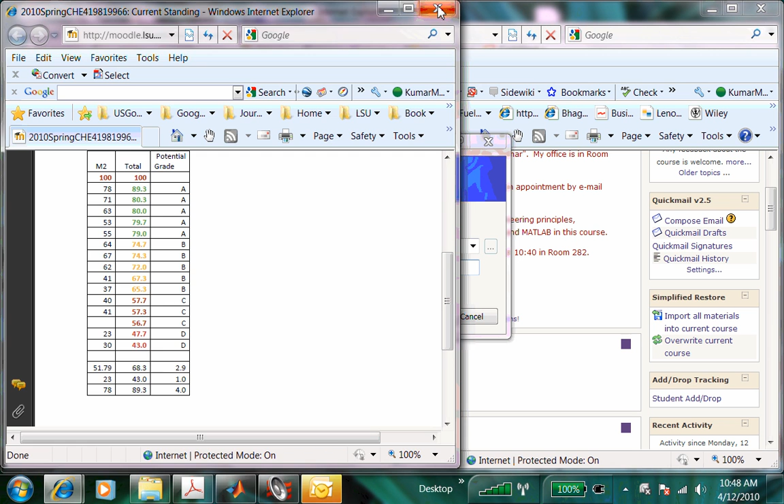Okay, if not, let's continue. We still have quite a number of topics to cover, but we are focusing primarily on feedback control systems. So what I'm going to do is look at feedback control systems for two types of problems that we've talked about. So we're going to use examples. And what you should be able to do in the final exam, and then when you go out into industry, is use these concepts. Replace the heated tank, as just an example, with any other process. Okay? And then design a controller, understand what various functions in the controller, like the proportional, integral, derivative, do to the process. And we're going to do that through a series of examples.

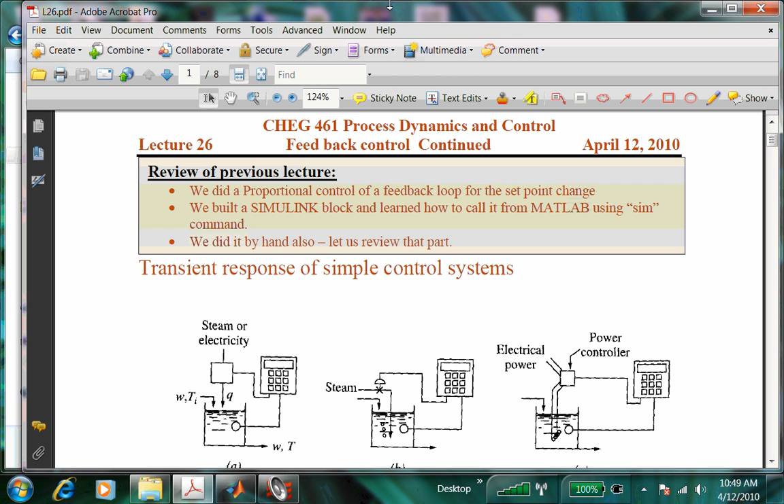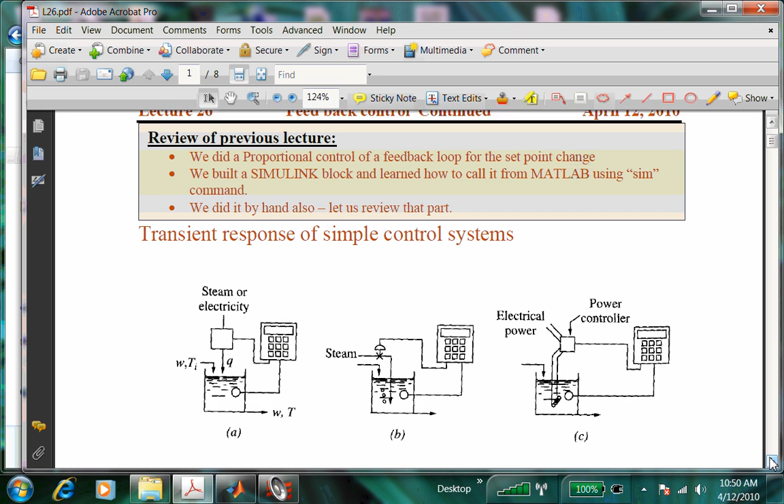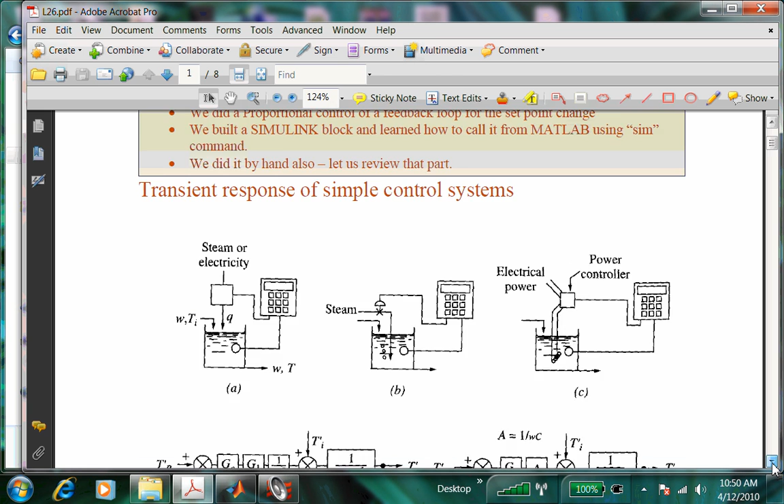We should be able to do it by Simulink, by MATLAB programming, and by hand. By hand I'm insisting simply because it's the only way I can test you in the final exam. But otherwise these days, hand is not really necessary because we have these tools. But you need to understand the tools, and you should be able to use those tools. Okay, so we looked at the regulatory problem. That is, when you make a set point change, you want the process to track that set point change. And the last lecture, almost a week ago, we looked at this problem where we had only a proportional controller. So GC is the proportional controller, and there is the heater.

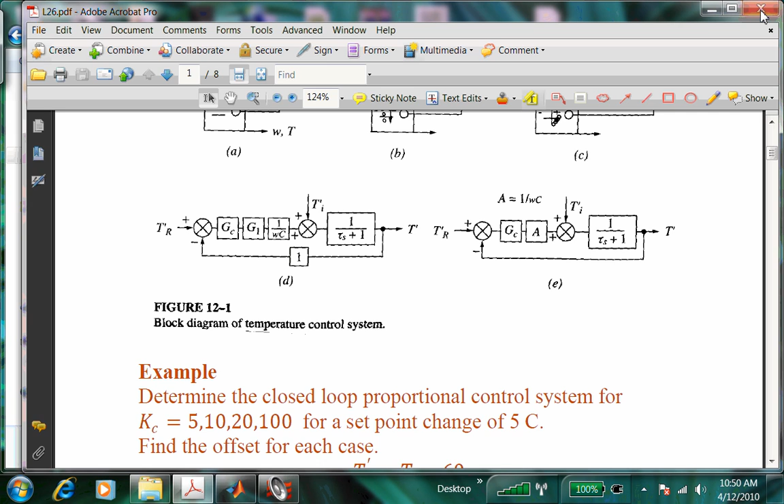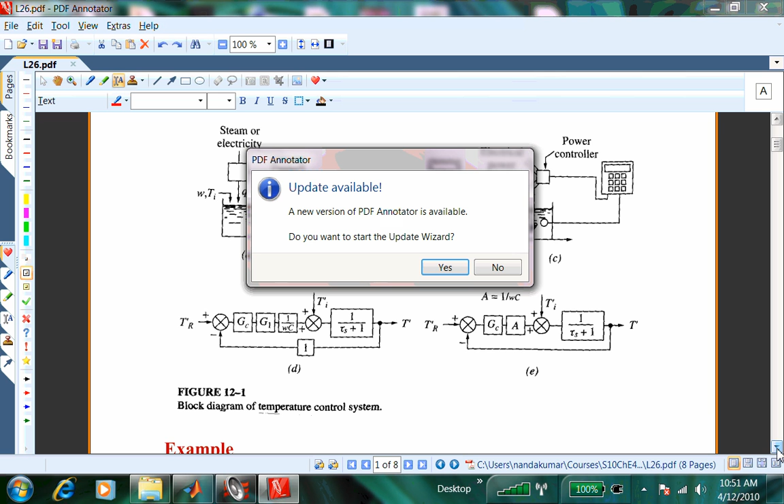I guess I probably put the wrong program. Not right. Okay, there. I don't want that now. Okay.

So we are looking at only a proportional controller. Okay, there it is. And the heater transfer function is simply a gain 1 over WC. And then the process transfer function is a first order process, 1 over tau s plus 1. And there is no measurement delay, so in the feedback loop there is no delay. It's simply a signal instantly measured. And what we were asked to do was look at the response of a proportional controller for various gains using a set point change of 5 degrees in TR.

So this we need to understand, the difference between a set point change in the process, which the process must track, versus a disturbance rejection, a load change. So if I change the inlet temperature, I still want the outlet temperature to be at the same value as before. Whereas when I make a set point change, I want the outlet temperature to follow the set point change. So I want the process temperature to go from 80 to 85 degrees. So I increase this by 5 degrees, then this must track. It must go from 80 to 85 degrees.

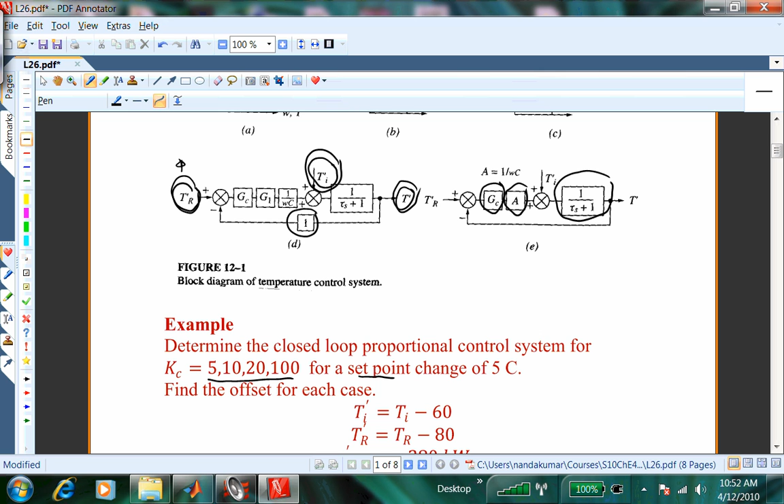Whereas if this changes, the disturbance changes, that is the inlet temperature goes from 60 to 65, you need to adjust your heater duty in such a way that the outlet temperature still is maintained at the old value of 80 degrees. So these are two different kinds of problems. The framework for analysis is the same for either one of them. So here for a set point change of 5 degrees, we did this in the last lecture by Simulink. Okay, so I'm just completing that part without Simulink.

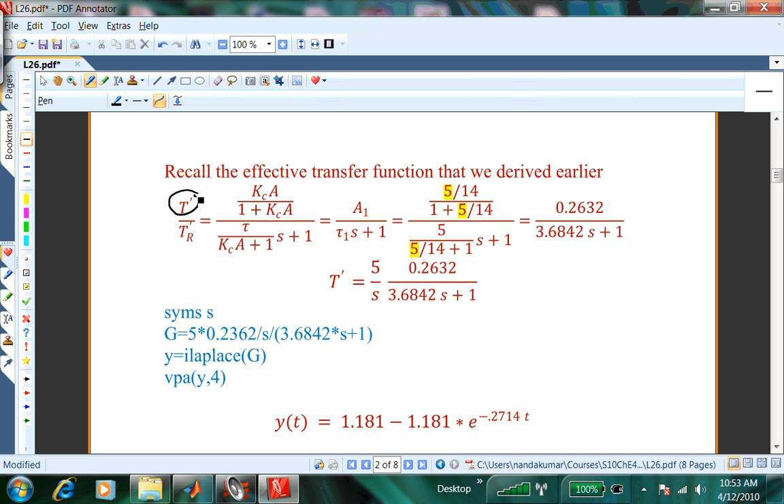Okay, so we have to find the effective transfer function between the outlet and the set point change, T prime and TR prime. So if you look at the process diagram here, that's going to be the effective transfer function. It is going to be everything between the outlet and the inlet in the forward path. The forward path is this way. So it's going to be GC times A times 1 over tau s plus 1 divided by the feedback loop, which is everything in the loop. But in this case there is nothing in the return loop, so it is simply the same thing, GCA divided by tau s plus 1.

That is your effective transfer function between T prime and TR prime, the deviation variable between the outlet and the set point change. So if the set point change TR prime goes by 5, the outlet temperature should increase correspondingly by 5 degrees. So you should tune the controller GC in such a way that it reaches that target in the best scenario, in the least possible time. Okay.

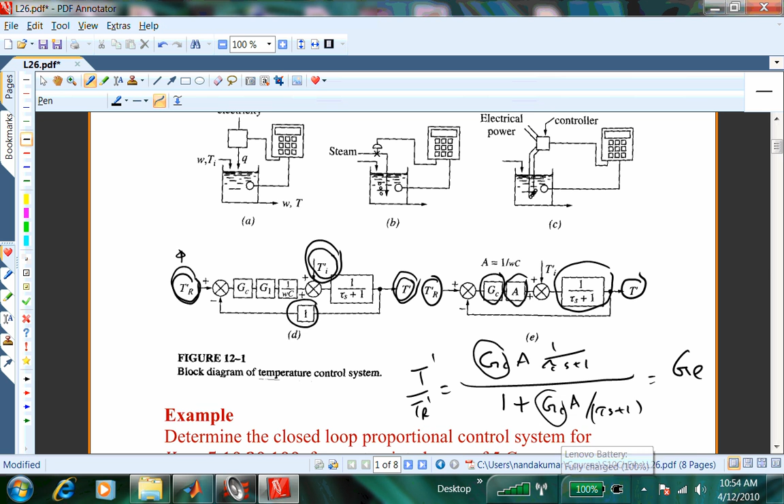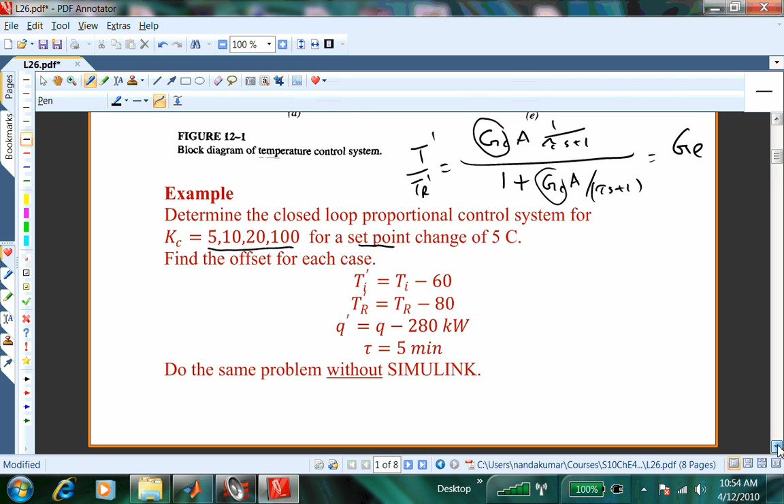So this is the effective transfer function, and we have done some algebraic manipulation to write it in the standard form. That's what you see here. So this is written as a new gain, I'm calling it A1, and a new time constant tau 1, S plus 1. So the whole effective transfer function is still a first order. That is something important to notice, because when I change this from a proportional controller to a proportional integral controller, the effective transfer function will change its characteristics from a first order to a second order system.

So I would request you to go through the algebraic manipulation, take the previous one that I wrote down as an effective transfer function, plug in all the numbers, and what you're going to get is this as your effective transfer function. And then we're making a step change of not 1 degree but 5 degrees. So this is nothing but TR prime in the Laplace domain. If I make a step change of 5 degrees, then in the Laplace domain it is 5 over S. So this is then the output, T prime. The output process temperature is 5 over S times 0.2632 divided by this.

So this you should be able to do in an exam. Do partial fractions, invert it, and I keep repeating it. In an exam, I give myself the freedom to give you up to a second order here. I don't count the 1 over S there. You should be able to factorize a second degree polynomial to get into partial fractions. And then I'm here using MATLAB to define that output and then take the inverse. And what you get is, in the time domain, the response of the system. So now we need to plot this to see how the response is.

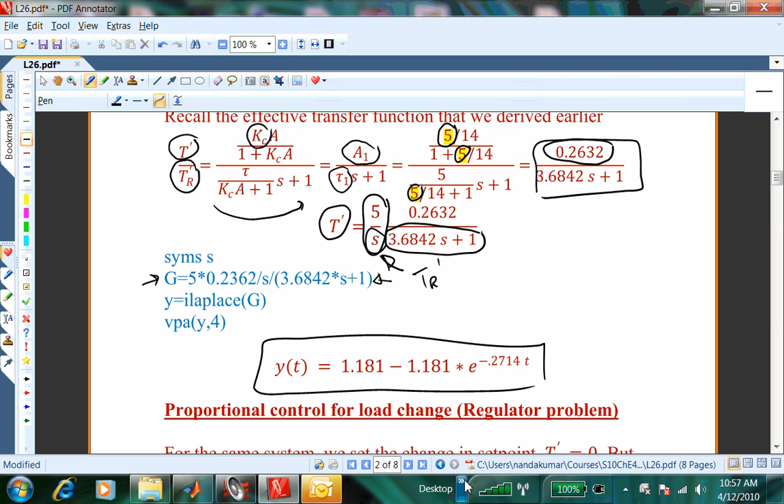You should be able to do analysis like this in an exam where you get the output response and answer questions like what is the time it takes to reach 80% or 90% of the steady state? How is it affected by changes in Kc? Things like that.

Okay. If there are no questions, let me go to the next problem, which is what I call the regulator problem. So here there is a change in the load, in the disturbance to the process, and the disturbance has to be rejected. Okay. Now, one thing I need to reinforce: when you have only proportional controller, whether it is a servo problem, tracking problem, or a disturbance rejection problem, you'll always have an offset.

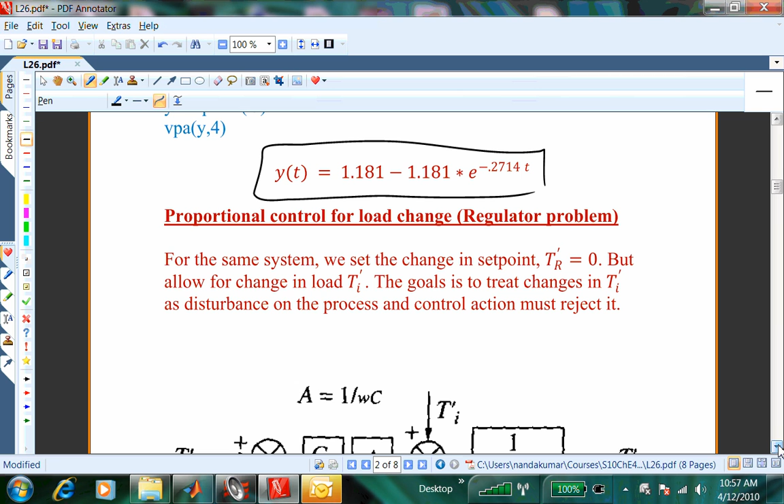Okay. So in the previous case, what would be the offset? Looking at that result. I'm not really then getting through, am I? Does everybody get that? Okay.

So what is the offset? How do you answer that question? The offset is the difference between the final steady state value and what you want it to be. So we wanted it to be 5. We are making a step change of 5. So we want the final temperature to be 5 degrees above the current steady state value, because these are all in terms of deviation variables. Okay? So we want it to be 5 degrees above,

but as t goes to infinity, this term goes to 0. Okay? So the steady state temperature that you're going to get, the deviation you're going to get is only 1.18. You want it to go to 5, it goes only to 1.18. So there is an offset. Okay? And that offset, that number will be affected by changing Kc.

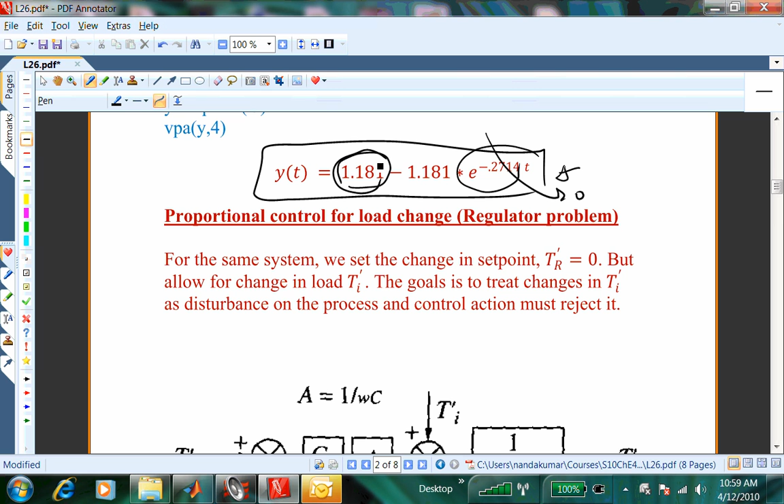Okay? And so the question might be, plot how does offset change as you change Kc? Okay? So no matter whether it is a disturbance rejection or a servo problem, tracking problem, you will always have the offset if you have only proportional controller. So the next problem we are going to see how we can overcome that using the integral one.

But before that, let's look at a case where TR, the set point change is 0. So I want the process to remain at 0 in terms of deviation variable, meaning it must remain at the current steady state value, whatever it is. But there is a disturbance coming in from the inlet temperature to the tank. It goes up by 5 degrees. What should you do? Okay. So of course, when that happens, you will sense that, and then you'll go back and adjust your heating rate in such a way that temperature is brought back.

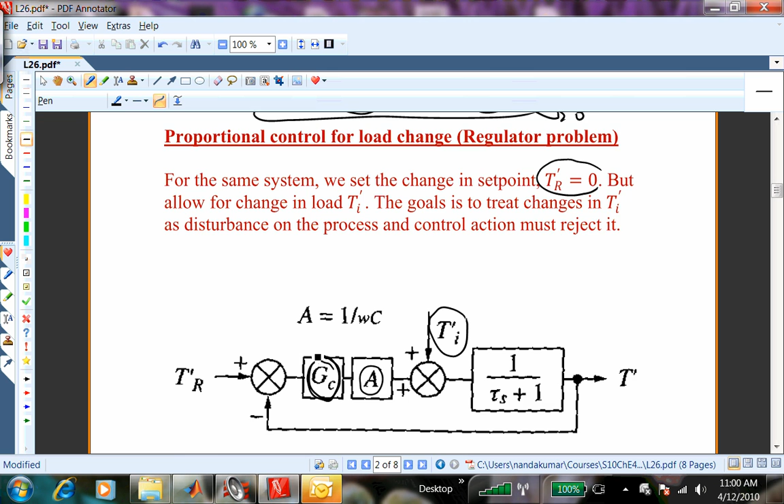And how fast will you adjust? That is what you're going to decide as a control engineer. You're going to decide what should be the Kc value to determine how fast the response is. Okay? How would you begin to answer that particular problem? A 5-degree step change in this, and plot the dynamic response of the effective process under a feedback control system where Kc is equal to 5, 10, 20, 100, etc. A series of numbers.

Find the effective transfer function. If you're doing it by hand, you will find out what is T prime divided by Ti prime. Okay? Because you're making the change to Ti, so you want the effective transfer function between those two. So what would that be? Using the rule, whatever is in the forward path between the output and the input divided by the loop. Okay? So in this case, there is only 1 over tau s plus 1 in the forward path between Ti and T prime, divided by 1 plus everything in that loop. Okay? So that's going to be GCA divided by tau s plus 1. That is going to be the effective transfer function.

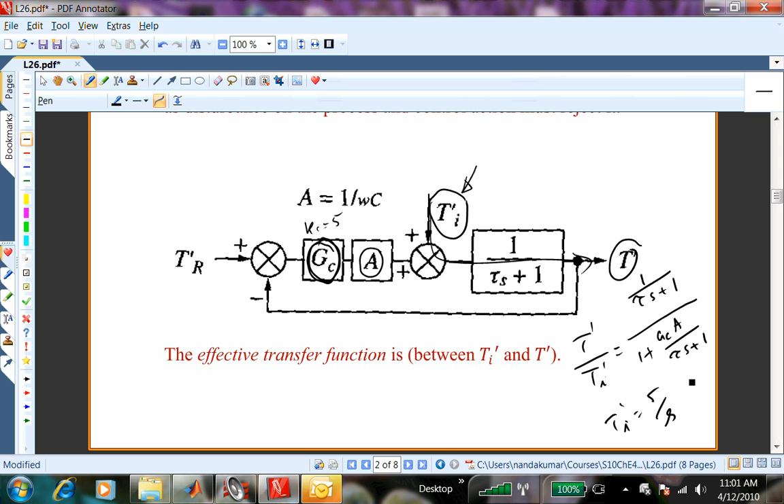Now we can plug in the numbers and then put Ti prime as equal to 5 divided by s, a step change. Okay? Of course, you should be able to do the same thing if I have not a step change but an impulse. Okay? Impulse response, what would be the thing for impulse response? It is 5. Okay? And if it is a sinusoidal change, if I give you the amplitude and frequency. So this is why we saw all these in parts. Now we should be able to put it together in any variety of ways, Simulink, MATLAB, or by hand. Okay?

And there it is. So this is the effective transfer function, T prime over Ti prime. And we'll rearrange, simplify, and get it as an effective gain and an effective time constant. Now, this time constant is different from the process time constant. Tau is the process time constant.

Okay, whereas this tau 1 includes the effect of the feedback controller. It includes, for example, Kc. Okay? So in fact, I've given you what tau 1 is. Tau 1 is equal to tau divided by 1 plus Kc A. Okay? So it depends on both the heater transfer function A and the controller transfer function Kc.

Now, at this stage, if I ask you to find out what is the offset for this kind of a regulatory problem, how would you go about it? There are many ways of doing it. One is, okay, I have the effective transfer function, I can invert it, I get the time domain solution, and then look at time as t goes to infinity. Another quicker way is to use the final value theorem without even having to go back to time domain. You can say, okay, I know the transfer function, so if I multiply it by s and take the limit of s going to 0, I'm going to get the final value without having to solve the problem.

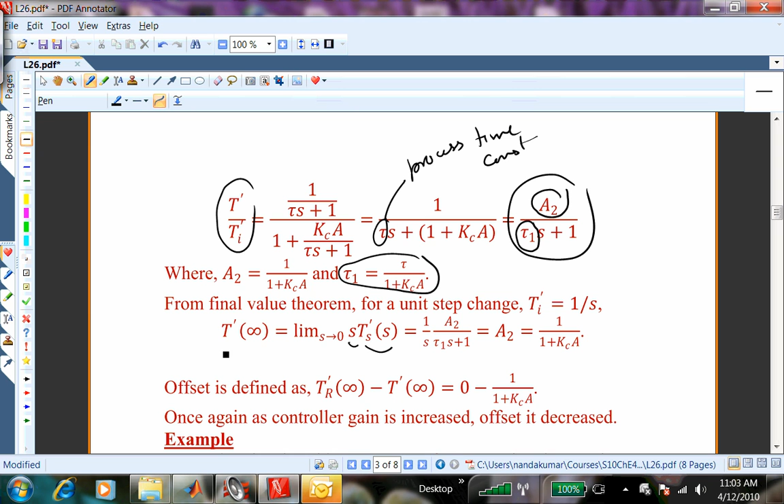And so when I do that, I get the final value of the process temperature as t goes to infinity is, as s goes to 0, s times Ts. Okay? And then multiply by s, and so I think there should have been... I have a typo here. Can you find out what the typo is? I didn't multiply by s there. Here I did. The next one, that s should be there, and then this entire thing is A2 divided by tau 1 s plus 1 multiplied by 1 over s.

Okay? So this is for a unit step change. Okay? So then the s will cancel out, and when you put s equals 0, you get A2. So A2 is your final temperature. So the offset will be the difference between what you want it to be. In this case, you want it to be 0 because it's a disturbance rejection. So you want the final process temperature to remain at 0 deviation variable. That is, whatever the current value is, you want it to remain there. Minus whatever this particular controller does, and it takes it to 1 over 1 plus Kc A. So that is an analytical expression for the offset.

Okay, so we can do this now for various values of Kc. What do you see? As you increase Kc, what happens to the offset? It gets smaller and smaller. So the only way to get rid of the offset is to have Kc equal to infinity. Okay? But there are other consequences of increasing Kc. Large value of Kc will give you a very quick response, very dynamic response, but it might make the system unstable. So we will see how to understand the implication of changing Kc on stability, and how do we design it in such a way that the feedback control system remains stable. Any questions?

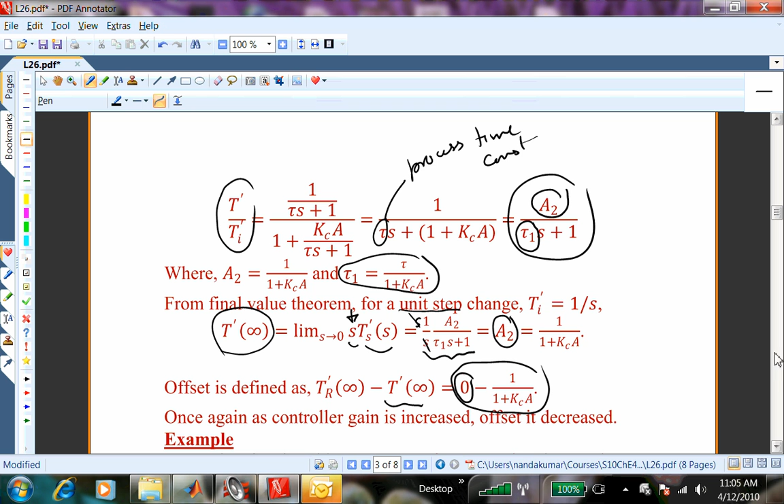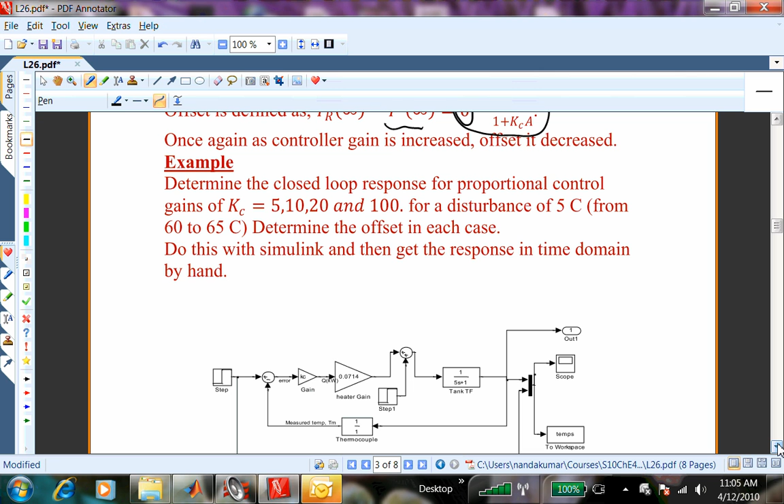Okay, here is a specific numerical problem. Determine the closed loop response for the proportional gain of Kc equals 5, 10, 20, and 100 for a disturbance of 5 degrees. Determine offset in each case. Do this with Simulink, then get the response and determine it by hand.

Okay, so there is the Simulink block diagram. How many of you feel that you still need help in Simulink doing this? If I give you this problem and put you in front of a computer, how many of you will have difficulty building the block? The reason I'm asking is I need to then give you some more problems and assignments that you can do. We've done this enough that all it needs is practice. I don't want to construct it in front of you every time because that takes up time. Right? So is it okay if I just throw this diagram and then go through it? Or, okay.

Good question. I just copied from the earlier one and added what I needed, but if I didn't do something to the step change, I will be introducing an error. So let me actually start. That's only a copy of the diagram. Here I have the actual Simulink model.

So your question is, why do I have this? Right? Now look at it and tell me, does it matter? I've gone into this program and changed it to 0. There is no step change. Okay, it's still there so that in case I want to replace it with something else, I can do that. But that step change is not effective.

But what I've done from the previous problem is added this block. Okay, this is the step change that corresponds to disturbance rejection. So here I have a disturbance of 5 units in Ti. Okay, and that enters just before the process. So the process is here, 1 over 5s plus 1, and this is the disturbance that is added to whatever the signal that comes from the heater.

Okay, and then this is a measurement. The measurement block is 1, and this is the feedback control, feedback loop that goes back. So it's essentially the same thing that I had before for the first problem that we did. All I've done is I've added a step change. So this is where the power of Simulink is.

So if you have this, I can then ask you questions like, what would happen if I put a sinusoidal change? What would happen to the output frequency? What would happen to the output amplitude? And that is an important part because when you're doing the stability using something called the Nyquist method, we will be using this kind of an analysis. But for now, let's get back to this.

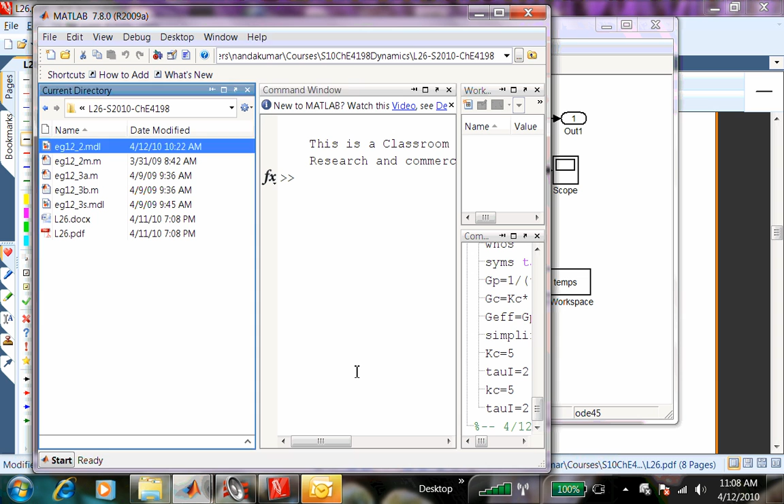So I have left Kc as a symbol here. This is the controller gain. And this is the heater, 1 over WC, 1 over 14, which is 0.0714. And you should be able to change any one of them to the appropriate process model. And so in order to run this, all I need to do is, in the workspace, I need to define Kc. Okay? So I go back to my workspace and put Kc equal to 5.

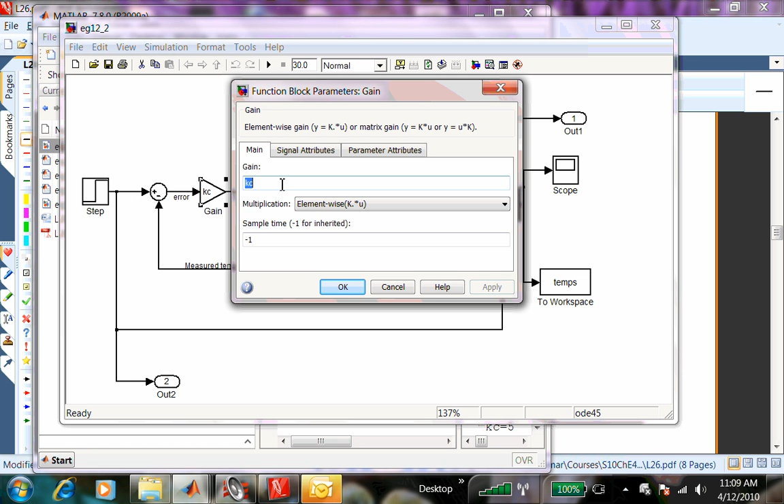Because I want to do this as a parametric study for Kc equal to 5, 20, etc., I'm just building myself that freedom by simply defining Kc as a symbol here. If I open the block, all I will have is gain as simply Kc, a symbol. So when it executes it, it's going to look into the workspace to look for that value. Now I can execute that. And you can see that figure. Okay, can you interpret that figure?

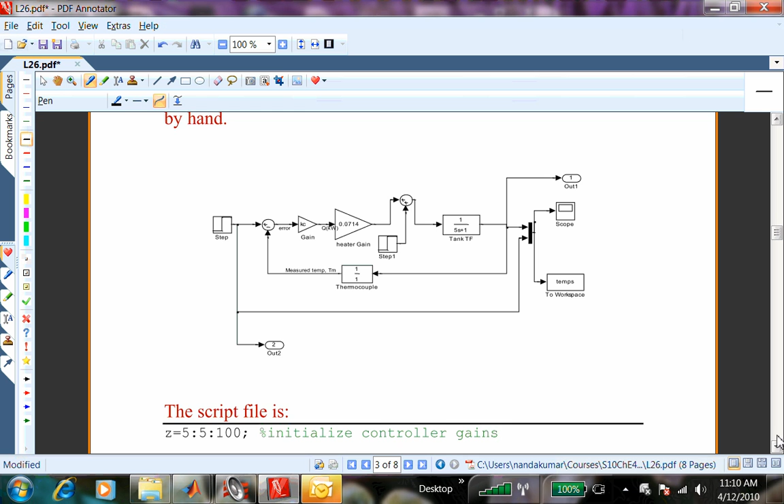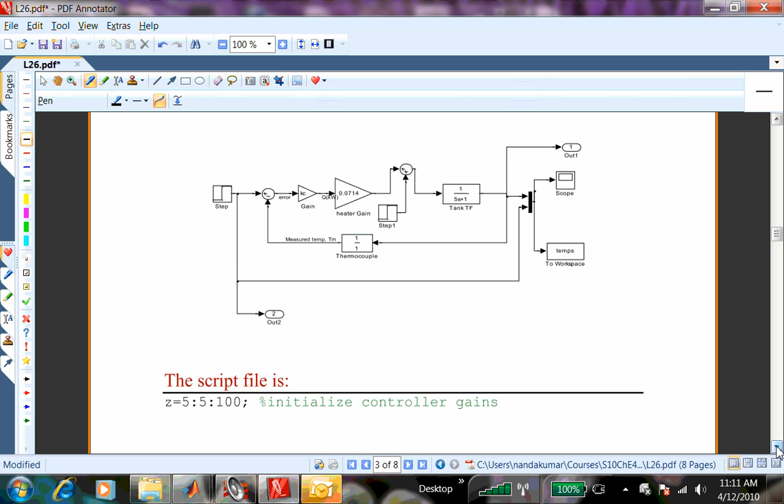Now we want to run this Simulink model many times, going from Kc equal to 5 to 100. Okay, so here I've set up a loop. We're going from 5 to 100 in steps of 5. Each one is a value of Kc. Because I've built Kc as a symbol in Simulink, I'll be able to run this from MATLAB. So all I'm doing here is setting up a loop for every value of Kc in that vector Z that I created, and then I pick that value from the vector Z and store it in Kc.

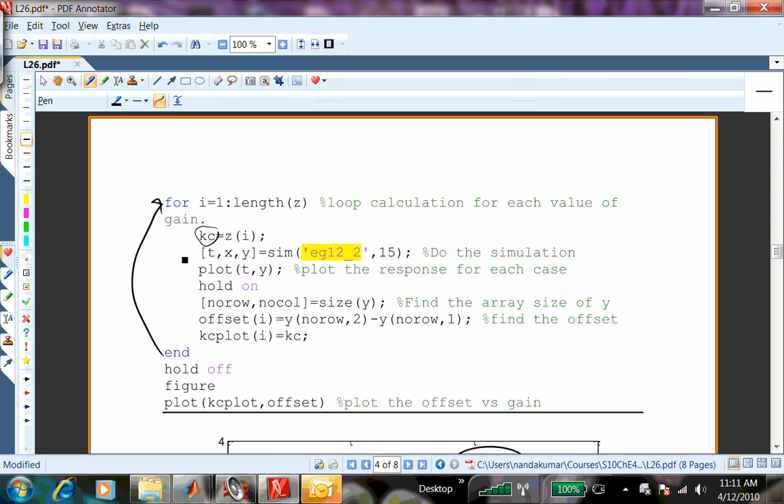Now it is this one that is going to pass the value of Kc to Simulink. So here I'm defining the value of Kc every time as I go through this loop. The loop is repeated 20 times or 19 times or whatever. And this is the one that actually executes the Simulink model. So the command is sim, and this is the file that contains the Simulink model. So you build a Simulink model, save it in a file, and then give the file name here. Here you say do it till 15 minutes. That's the time over which you want to integrate the Simulink model.

And then what Simulink sends out is a vector called t, which is time, and a vector called x. This I think I probably did not answer last time to your question. X is actually something called a state variable. For now, we will not worry about what it is. When we look at state space models, we will understand what it is. But Simulink automatically deals with an internal variable called a state variable, state space variable. That's what X is. Now, Y is the variable that we compute in the Simulink model.

So if you go and look at the Simulink model, I send out two values, out 1 and out 2. Okay, so these are the ones that are sent out as Y in the command where I call Simulink. Okay.

So Y contains all the output links. I can have as many output links as I want, but it will be sent as columns of Y. So Y will actually be a matrix. Each column will contain one of those output links that I have in the Simulink block.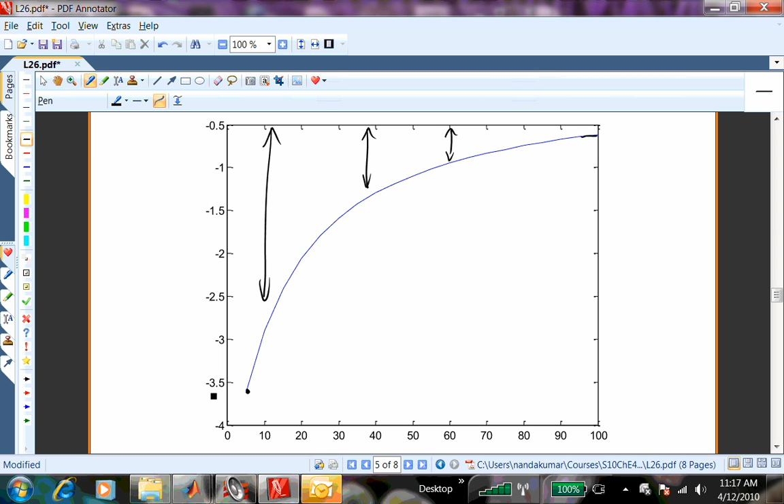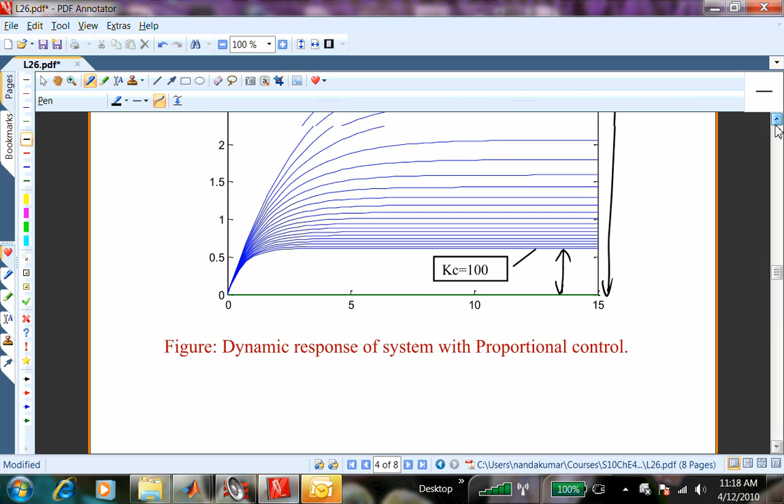Oh, yeah. This simply says, let's make sure that we understand this, okay? I don't want to sidestep this. What does this diagram tell us? This diagram tells us whatever the steady state value is, the process temperature is going to be above that. So when Kc is 100, for example, the steady state temperature is going to be 0.5 or 0.6 degrees above what we would like it to be.

Suppose the process is operating under steady condition, the outlet temperature is 80 degrees, okay? And the inlet step change is 5 degrees, the inlet temperature. So the controller is going to take action by reducing the heating rate to get rid of the effect of the 5 degree increase in the inlet temperature. But it's not able to do that.

Without any controller action, what would happen to the outlet temperature? If the inlet temperature goes up by 5 degrees, it's a linear process, the outlet temperature will go up by 5 degrees over a long term. So the controller action is bringing it down: if it is 80 degrees, instead of being 85, it's going to be 80.5 when you use Kc equal to 100.

So this diagram simply tells you what will be the process temperature, and if you are asked what is the actual process temperature, you should know what the current operating steady state value is, add this to that, and that will give you the process temperature. Okay? But the offset is defined as the deviation from this. And so that offset decreases as Kc increases, but it is a negative value simply because that's the way we defined it. Okay?

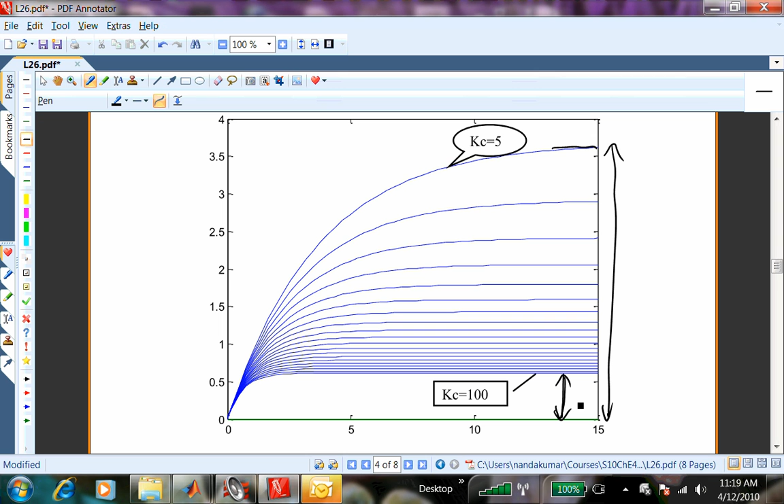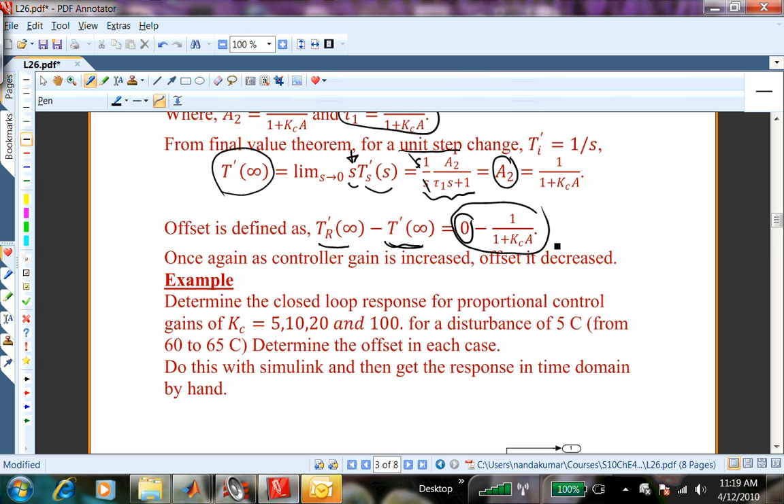And yeah, so the definition says 0 minus that. Okay, and that's why I get that negative sign there. Any other questions? Yeah.

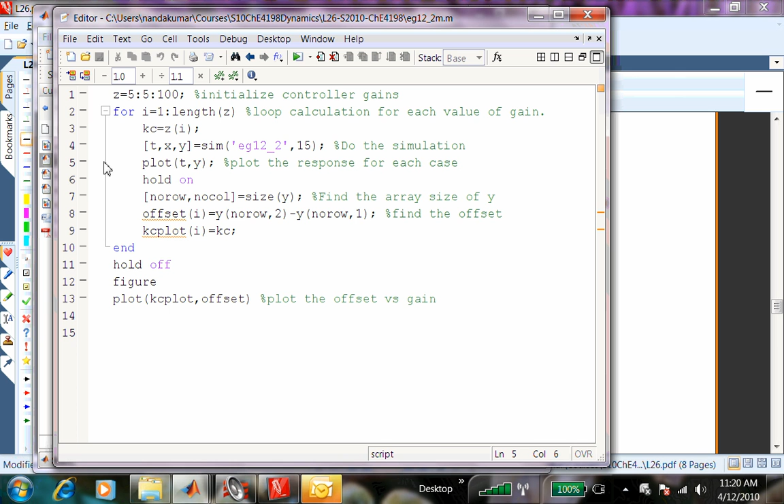Yeah, let me just run this. Okay, so this is the script file. So you're asking this one, right? Is it plotting both columns or one? Yeah. You do see another line, and now as you run through this loop, you will see that it keeps on adding to that graph. At the same time, it's accumulating what the offset is in line 8, but it doesn't plot it. It accumulates the offset for every value of Kc, and then it'll plot Kc versus the offset at the end.

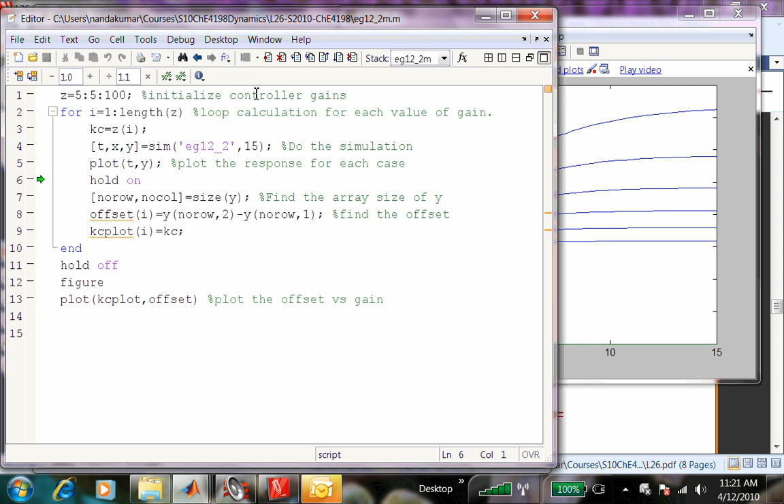So you see the second line appearing, third line appearing. Every time I go through the loop, if you want to look at the value of Kc currently, it's 20. Okay, so it just keeps on plotting that. Remove this and then run it. It's going to add all the cases and then plot the final graph, which is offset versus Kc. Okay. That's the last line. Line 13 generates this graph. Pretty true. Any questions? Yeah.

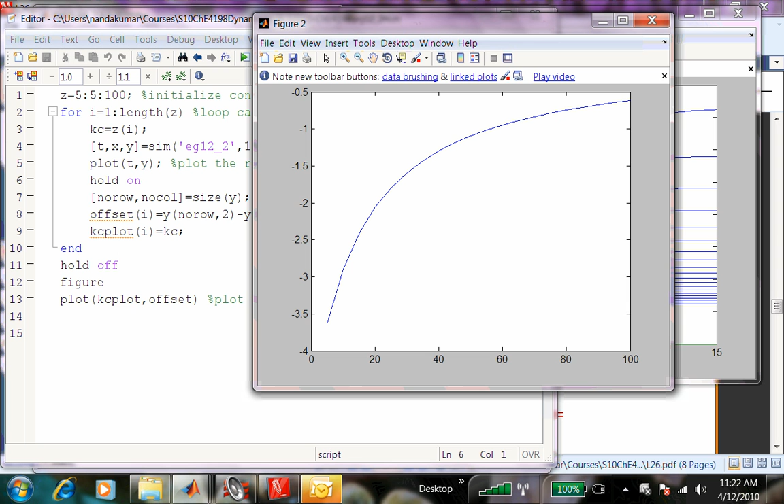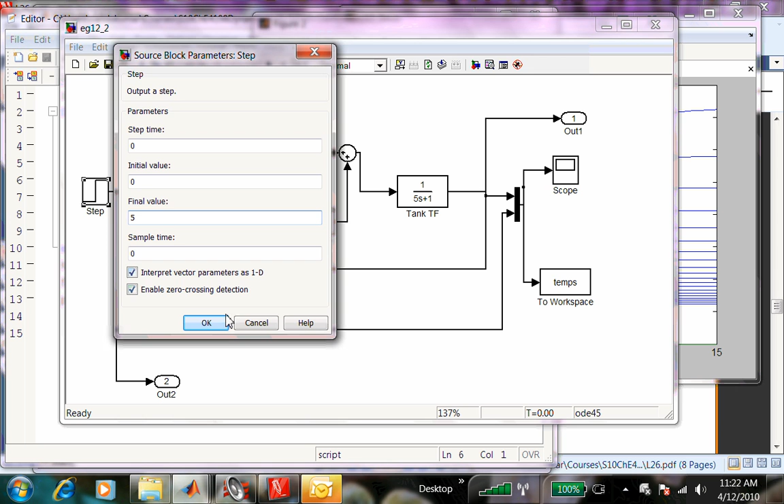Yeah, good question. So you're asking, when I have a disturbance, simultaneously I have a step change in the goal. Is that what you're asking? What do you want the goal to be? 5 or minus 5? Let's do it 5. I don't know the answer. To find it analytically is going to be very complicated. You have to use superposition, a lot of algebraic manipulation. What we are doing now is, we have step change in both the disturbance and in the servo problem. Okay? So when you run this,

so the step change, wow, it looks like it reached, there was no offset. I was not anticipating this. I thought that there will always be an offset. So there must be a special situation where, if you make a disturbance change of 5 degrees, the heater is trying to compensate that, right? So that somehow cancels. Yeah. Right.

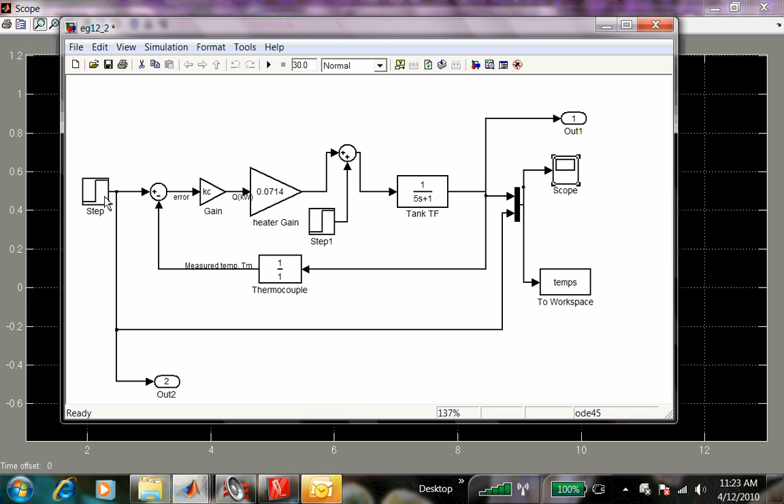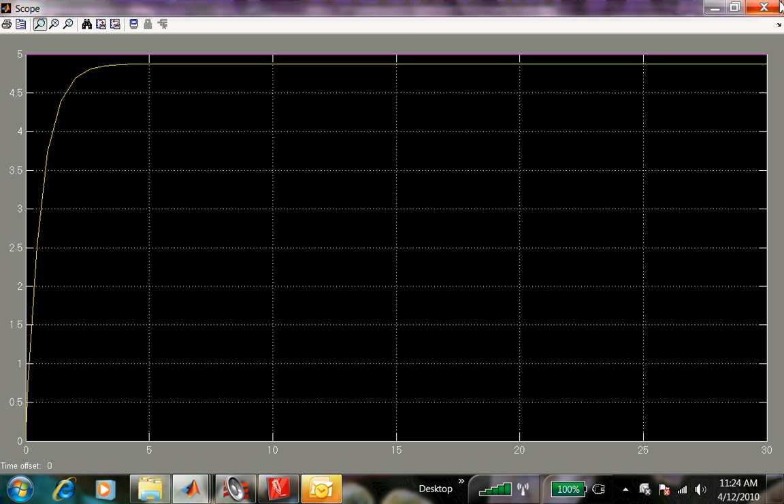Disturbance of 4 you want, right? Okay. This is the nice thing about the MATLAB Simulink environment. See, now you have an offset. Right? So that was a special cancellation because it was 5 in both. But you do have an offset, yeah. And you can play with this by putting ramp inputs or sinusoidal or any other. Remember, in one of the exams, you had this complicated input function. We had a ramp and then a step and things like that. So Simulink makes all those very easy to implement. Any other questions? Okay.

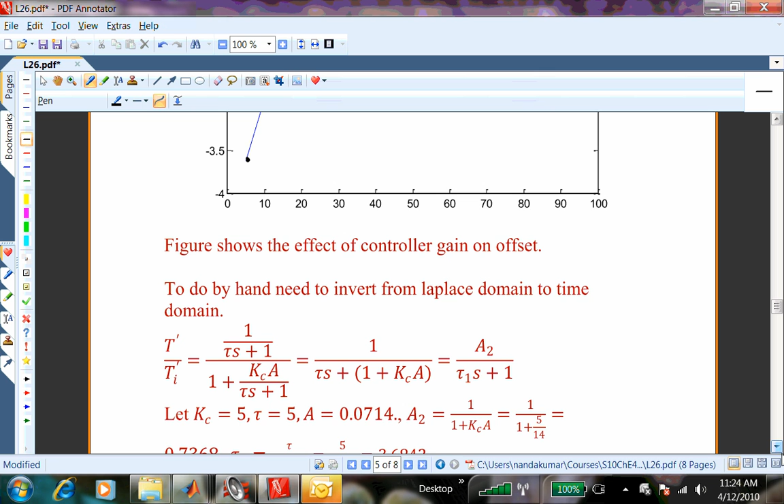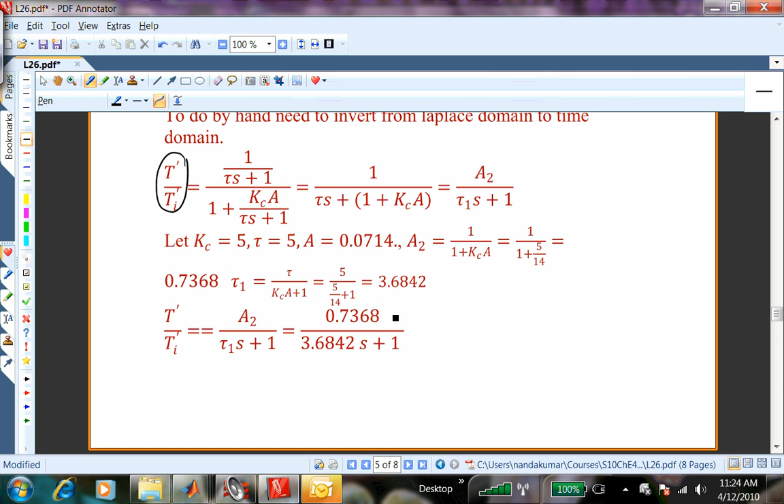All right, here by hand. By hand simply means you're going to find this effective transfer function between the output and the disturbance in this case. And I've shown you, after plugging in all the numbers, what happens to that effective transfer function. Okay? That is going to depend on Kc. So you have to do this for every Kc by hand. And then you can put a step change for Ti, that is 5 over S, step change of 5 units, and then do the inverse in MATLAB, and you get your time domain solution like this.

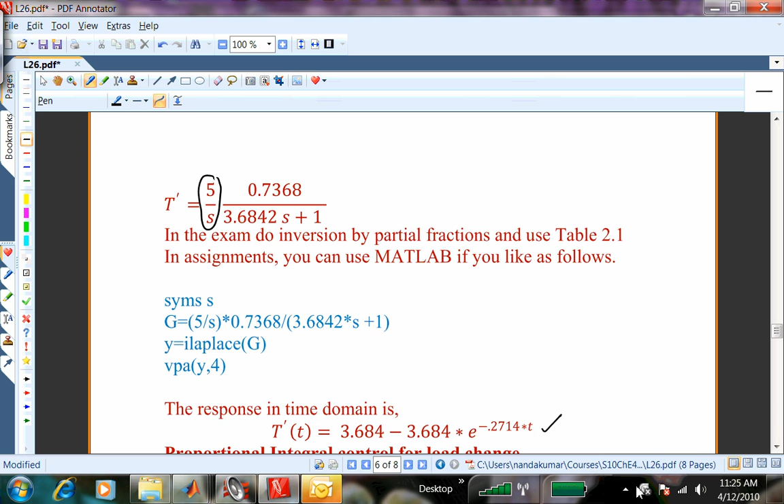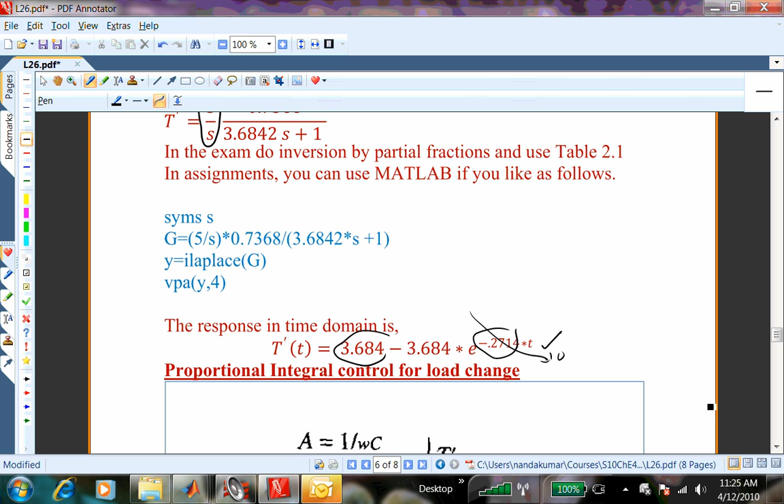And once again, if I ask you the question, what is the offset here? The offset you need to find out as t goes to infinity; because of this negative sign, this goes to 0, and this is your final steady state value. But we want it to be 0. So 0 minus this is your offset, which will give you negative 3.684 for a Kc value of 5. Okay.

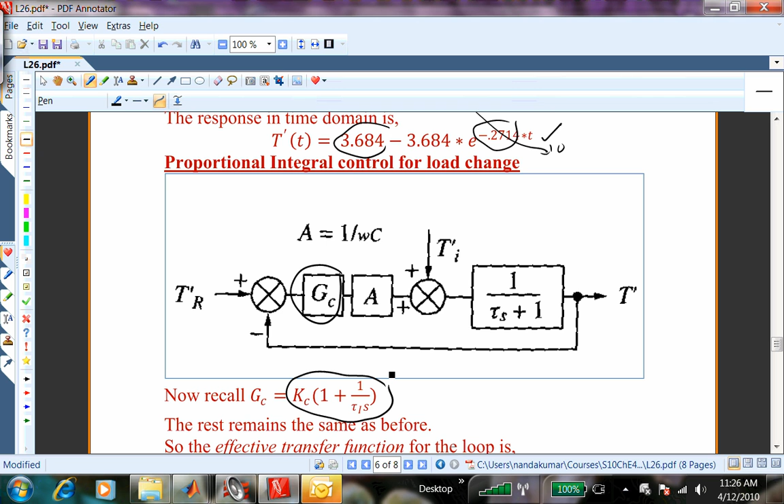Okay, let's start up the next problem, which is proportional integral control. So the same problem, the same heating system, but GC now is going to be handled by this transfer function, Kc times 1 plus 1 over tau I s, with an integral time constant. Everything else remains the same. So what does it do to the response?

Now the integral action we have seen already is one that accumulates errors. Integral is area under the curve. So if you have an error that is a function of time and the error persists, the integral action is going to accumulate all those errors and take an action in proportion to that. And that's why it's able to drive the error down to 0, because it's not just looking at the current error, but at all the past error, accumulating it.

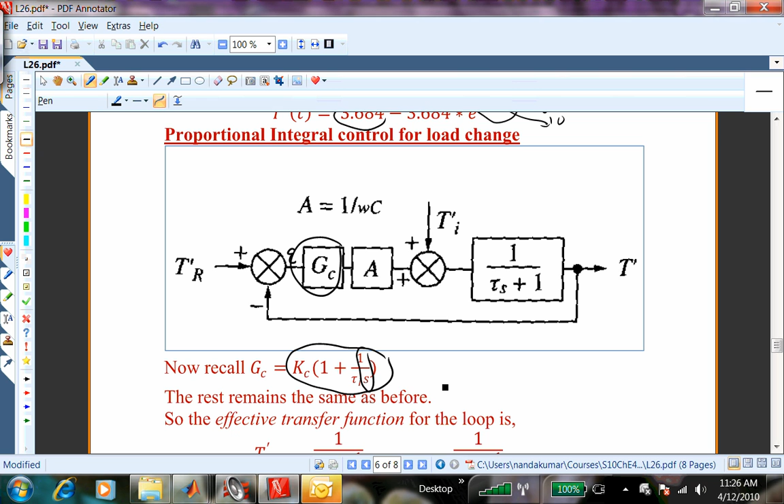And that is the integral in the Laplace transform. The integral is 1 over s. Derivative is always multiplication by s. Integral is division by s. That's why you get 1 over s from there. So now the only change from the previous part is change in GC. The GC that we had previously for the effective transfer function is going to be replaced by Kc times 1 plus 1 over tau I s.

But look what it does to the effective transfer function. If you have to simplify this, by simply looking at it, can you tell is it going to be first order, second order, or unpredictable? It turns out to be a second order. So you need to do an algebraic manipulation. For example, take the common factor, tau s plus 1, and multiply this out.

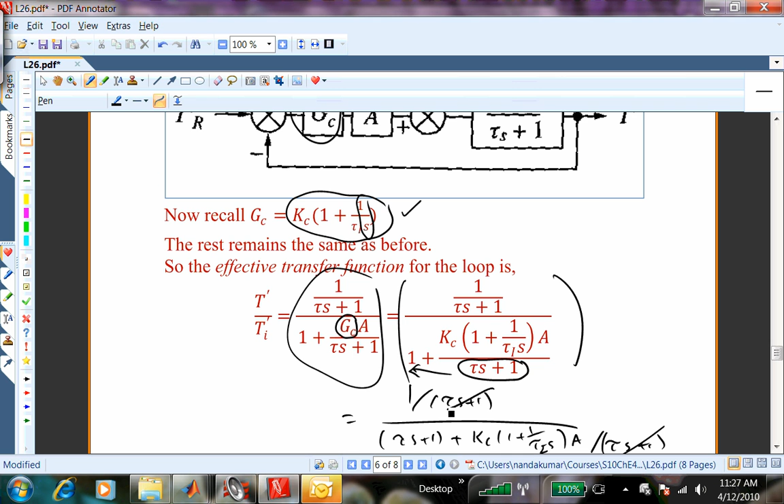And you will get 1 divided by tau s plus 1, divided by tau s plus 1 plus Kc times 1 plus 1 over tau I s times A divided by tau s plus 1. So this tau s plus 1 cancels, and what you get is 1 divided by tau s plus 1 plus Kc times 1 plus 1 over tau I s. So you need to multiply again by tau I s. And so you'll get the tau I s in the numerator, and in the denominator it goes to s squared, and tau I and tau get multiplied.

So the process time constant is still tau. But the effective time constant changes because it changes into a second order process. What should immediately come to your mind? Second order process can have oscillatory response. Critically damped, overdamped, underdamped, all those possibilities exist, even though the process is only a first order process. The heated tank problem is a first order process; the integral action gives rise to an effective second order response.

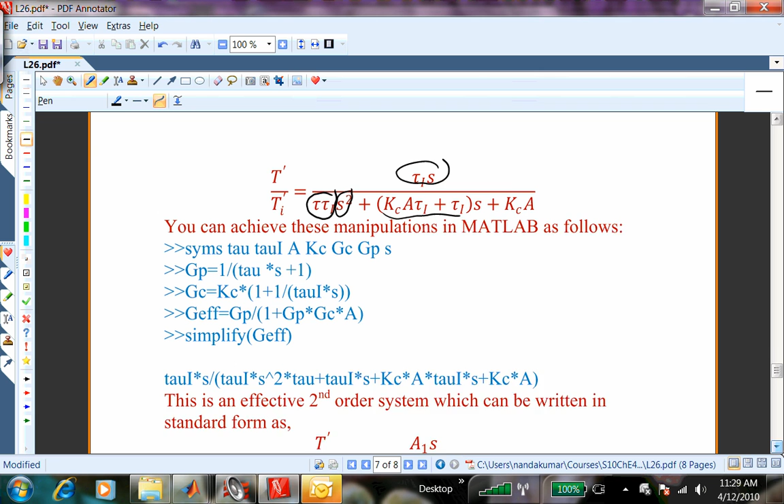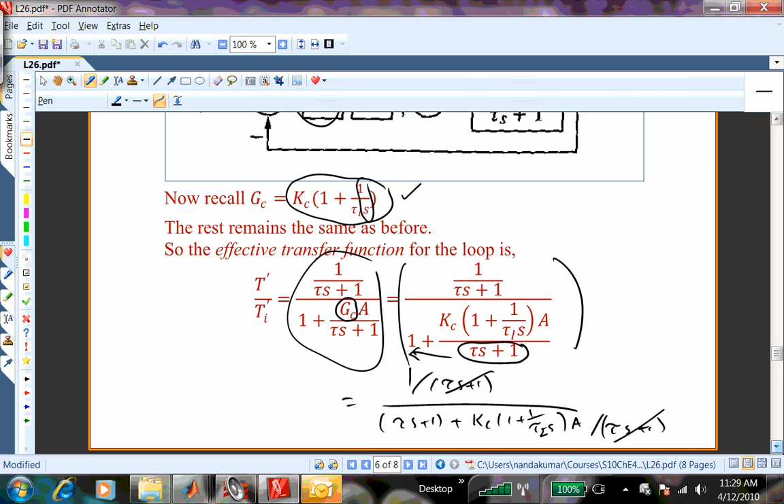Any previous page? Yeah. Okay. Both at the same time.

So if you want me to fill out an intermediate step, it will be tau I s, because now I'm going to take this and multiply everything by tau I s. So I will get tau I s times tau s plus 1, plus Kc times tau I s plus 1 times A. And then you need to expand that, and that's how you will get tau I times tau times s squared. Then collect all the s terms, you'll get these two, and then the constant term, which is Kc times A.

Do I have an error there? Here I'm multiplying by tau I s, right? So it is Kc, right? Thank you. And that's what gives you this term.

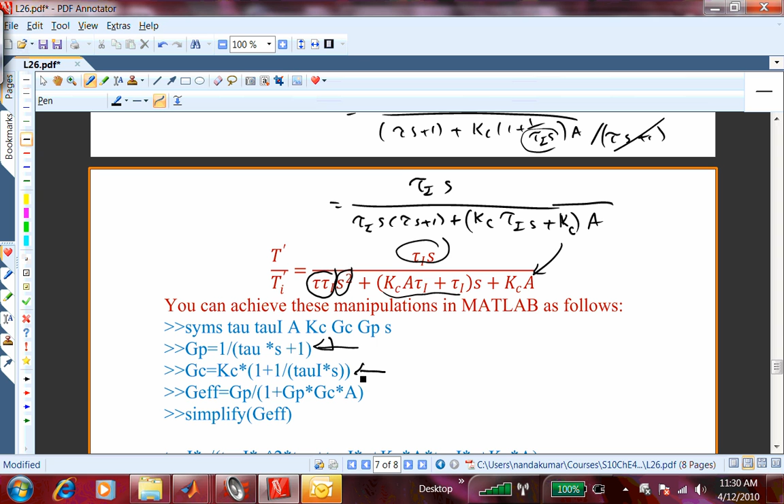You can, of course, do all this in MATLAB, and I've given you the code to do that. Here I'm defining the process transfer function, the controller transfer function, and then the effective transfer function by applying the rule, forward divided by the loop. Then ask it to simplify, so you don't have to do any of the algebra, and it gives you this expression, which is the same as this one. And then you can do ilaplace to invert back. But the important thing to notice is that it makes it into a second order process.